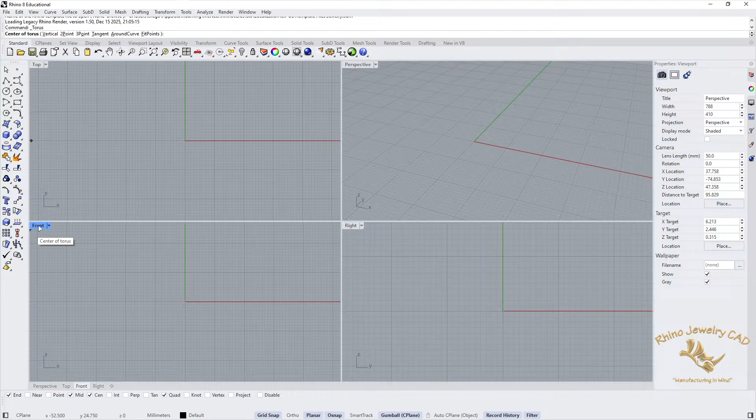Let's take me off the screen. Thank goodness, huh? And we'll go to the display capture here of Rhino. So what we're going to do today is we're going to make a sort of a signet style ring out of a torus. That's one of Rhino's solid objects here, a torus. And in the front viewport, we'll start at the 0, the origin, we call it in Rhino.

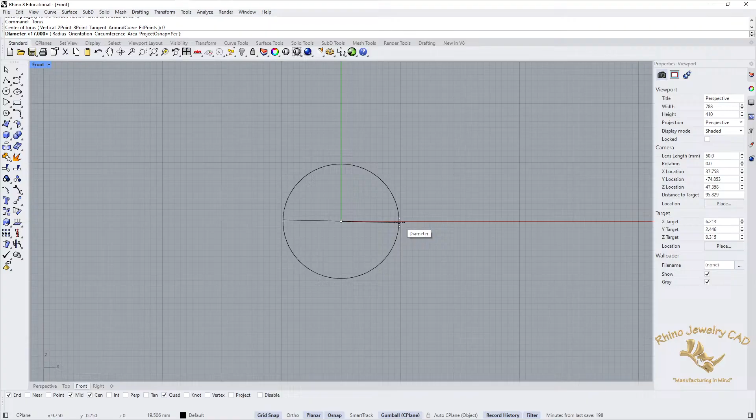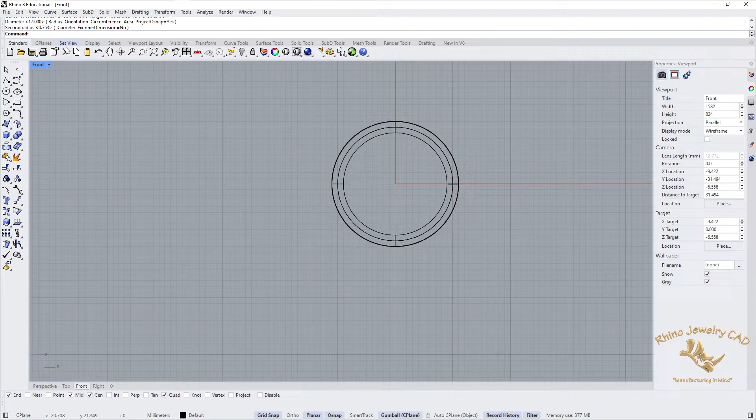And let's see, we know that a size 10 ring is about 20 millimeters in diameter, roughly. So this isn't going to end up a size 10, but we're going to make our first click out here at 17 millimeters. And then we're going to bring this in to, let's zoom in here. And we want this to end up being a shank of about 1.5 millimeters. 2 millimeters wouldn't be bad. Let's go full 2 millimeters. And so now we have our torus. Let's see what this looks like in perspective view.

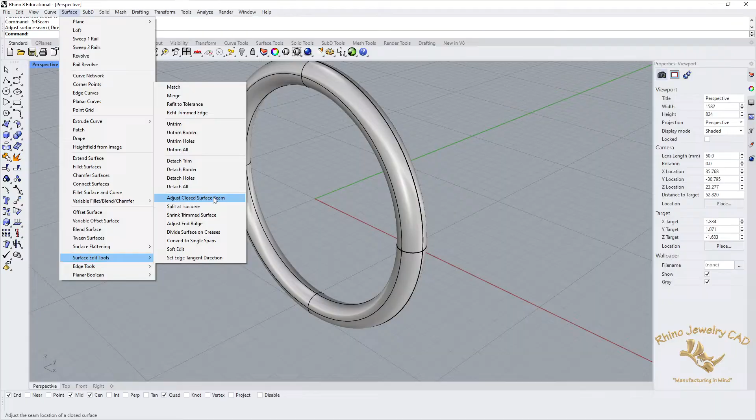Before we continue, we're going to actually do one thing here. We're going to select this object, and on the surface, we're going to surface edit tools, and we're going to adjust the closed surface seam. So right now, it's at top dead center of the outside of this torus. We want to move it to the inside, just like that. Simple enough. And now, it didn't look like the seam actually moved. Let's try this again. Surface edit tools, adjust closed surface seam on here. Yeah, for some reason we didn't.

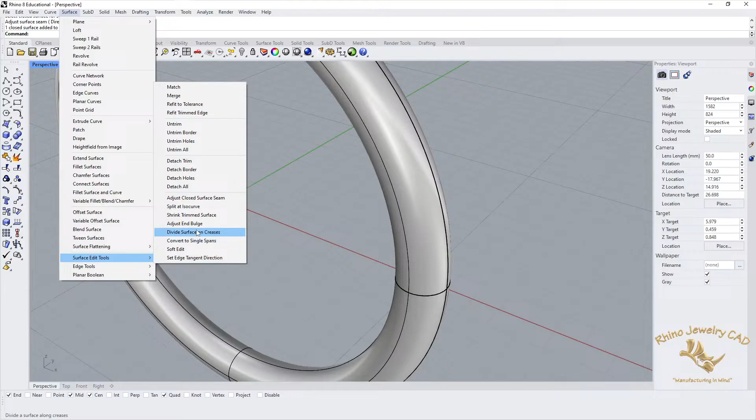Here we go. Let's see. Yeah, there we go. And that should have done it, but it didn't. And see, here's the problem. It worked fine when I was practicing. Oh my gosh. We're going to do this one more time. Surface edit tools. I promise this works. Adjust closed surface seam on this surface. And we're going to take it from here to this midpoint. And I'm still not sure we accomplished our goal.

So now, if you could see my face, you could see that it's really red. I'm going to keep plowing at this until I can get it to work. Let's take off center, mid, quad, and end. Let's unclick end and try this one more time. It's funny, when I was practicing yesterday afternoon, it worked just fine. Surface edit tools, adjust closed surface seam on this surface. And we want it to be right there.

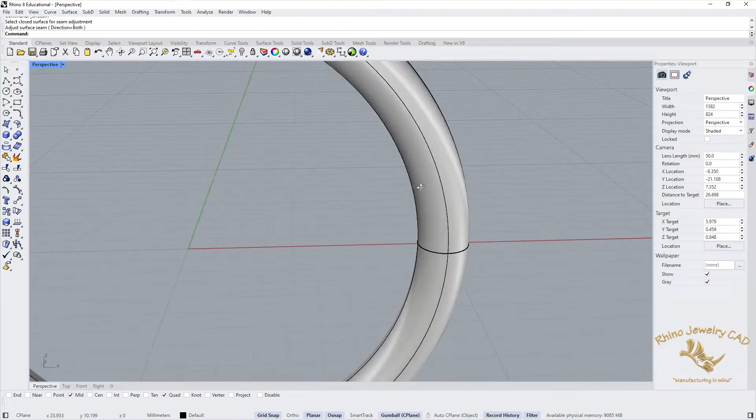And it still didn't work. Well, it's not imperative. It would have made this go a little bit more smoothly, and I'm going to have to come back now and do a short video on why this didn't work for you. But let's go ahead and proceed. I will show you where it would have made a difference as we get a little bit further into this.

I apologize for that little glitch. But see, that's the fun thing about doing a live. You see what happens when you're using Rhino. You run into these little things as they happen.

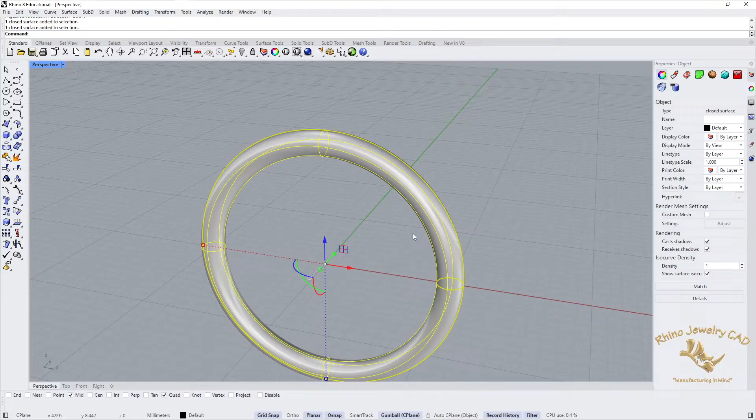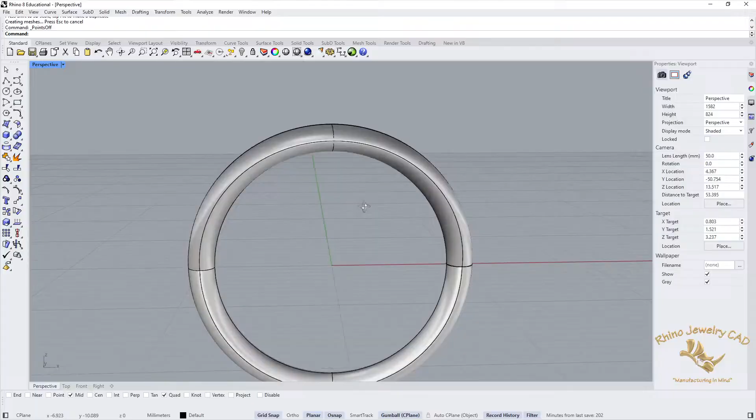Let's highlight this and turn on control points, F10. And one of the things that we want to do here is just make the top wider. All right. Now, here's the deal. I'm going to turn control points back off, F11, really quickly. And that's okay. That accomplished what I wanted, more or less. But I don't like this transition. I would like for that to be a much smoother transition.

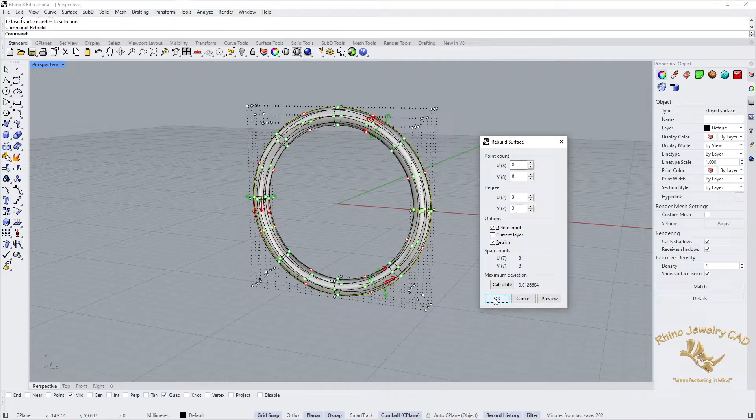So I'm going to Control Z out of what I just did. I'm going to select this and rebuild. And when this pops up, you'll see I don't necessarily want more point count in either U or V, but I definitely want to change it from degree of 2 to 3, and you'll see what difference that makes. Let's click OK here. And you can see that our control points have changed a little bit in character in terms of how they follow the torus all the way around.

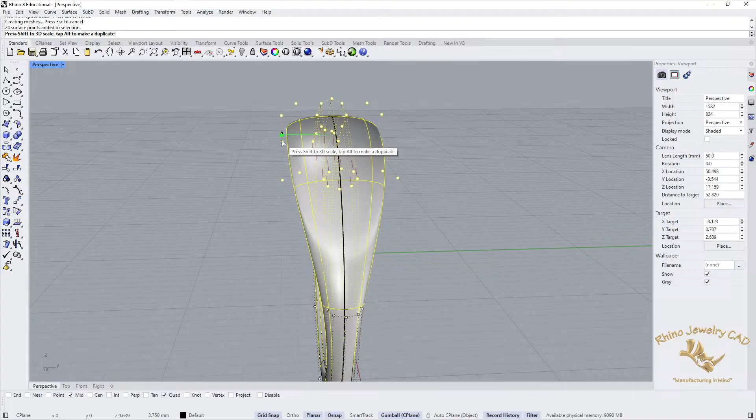Let's select that same group and do the same kind of scale that we did before and watch this transition point here. Okay, see how this is a much smoother transition into the top of the ring? I like that a lot better.

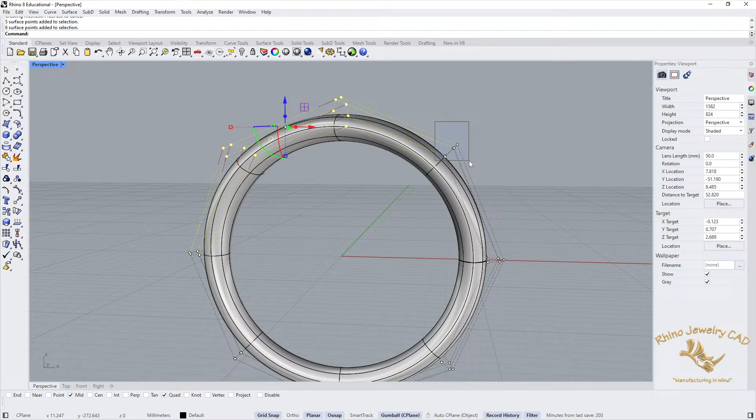Let's leave these control points on for the time being, and let's just select this group of control points. Holding down Shift, we'll select that group of control points, and Shift select that group of control points also. And now we're going to make the top of the ring just a little bit thicker by simply moving those up. And again, since it's degree 3, we have a nice smooth transition all the way around. It didn't affect this transition right here much, but it gave us a thicker area to work with on top.

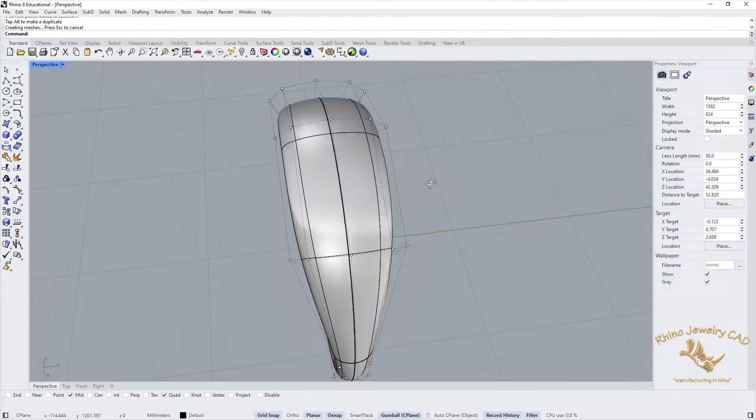It's getting fun now. Okay, let's turn off control points. That's an F11. Pop into the top viewport. And let's make an ellipse. Have grid snap on, so this will make this easy. We're going to just eyeball this ellipse. I'm going to shift constrain it out to the right about as far as I think will be appropriate for what I want to accomplish, which you're going to see in just a minute. And then make it about that wide.

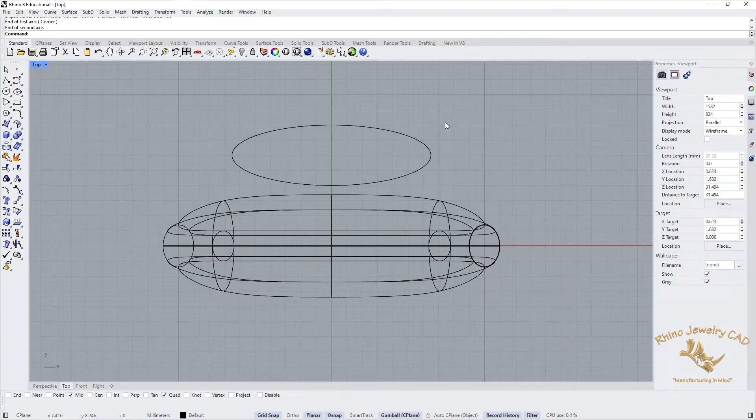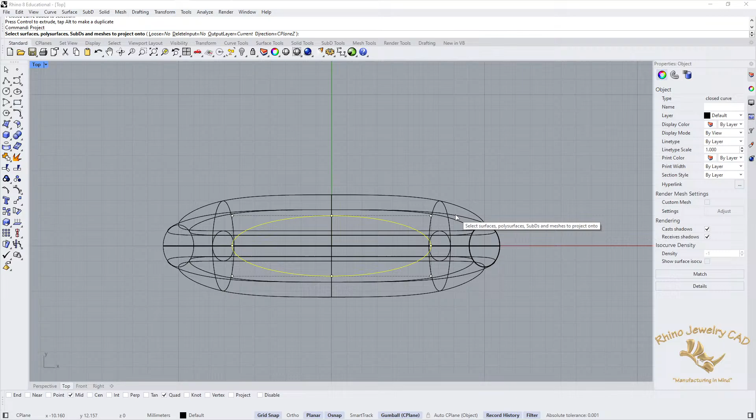And then I can move this down so that it is basically centered on the origin as well as the ring. Let's look at what we have here. Okay, that's in perspective view. We're going to select, use the directional arrow just to move this up. And again, from the top viewport, we're going to type in the command Project. Okay, select surfaces. See, this is still just a single surface. So there's no way to isolate this projection onto the top of the ring, which is the only place where we really need it. But that's going to be okay.

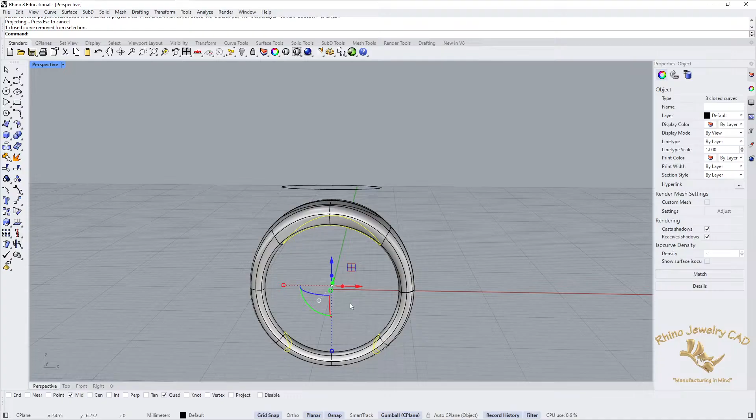Press enter. All right, and now if we look at this again here, you can see that this one at the top is really the only one that we needed. Let's deselect that one and then just delete the other highlighted ones. Okay, if we were going to do good layer management here, I would put this on a layer so that I could come back to it. But in this case, for the demonstration, I'm just going to delete it.

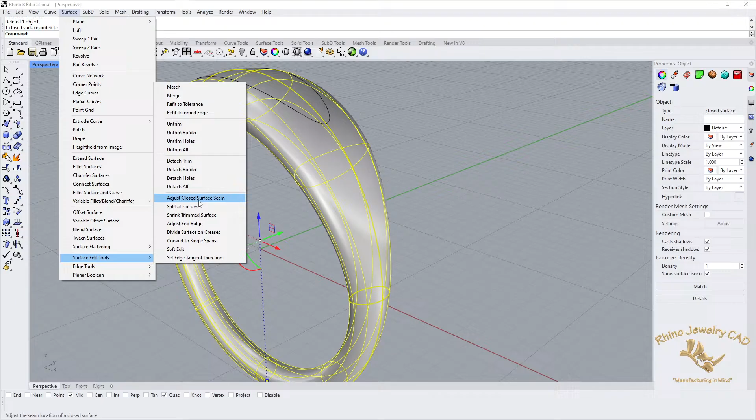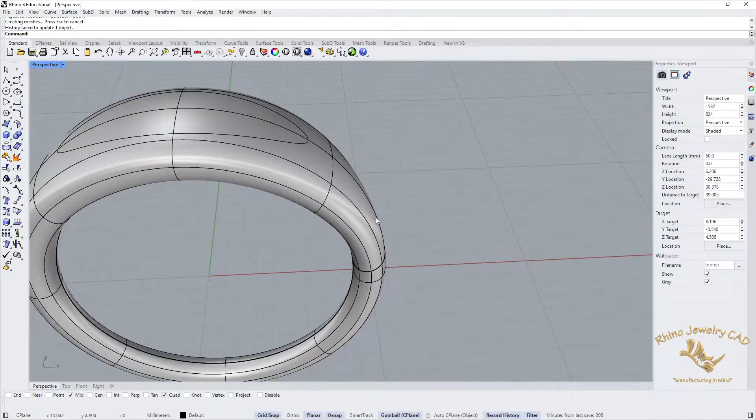All right, I'm going to try this just one more time here. Let's select the surface while we still have it. Surface, surface edit tools, adjust closed surface seam. Okay, now I just don't understand why that's not working, but let's see if that worked that time. Oh, bingo. Okay, we got it. It's not perfectly centered, but in this case, it really won't matter. And I'll show in the next step why this is going to make my life a little bit easier as we progress through modeling this ring.

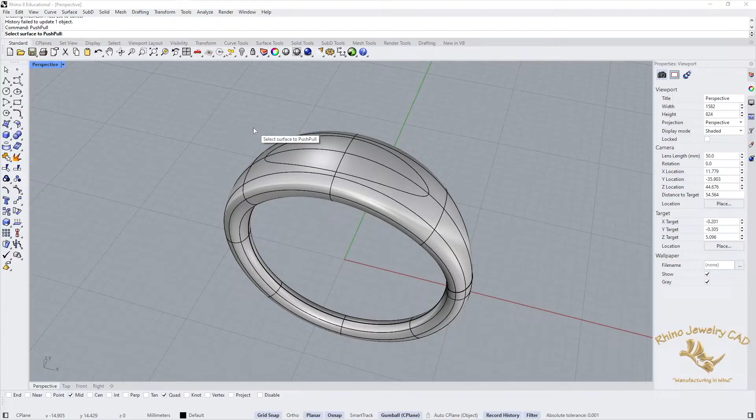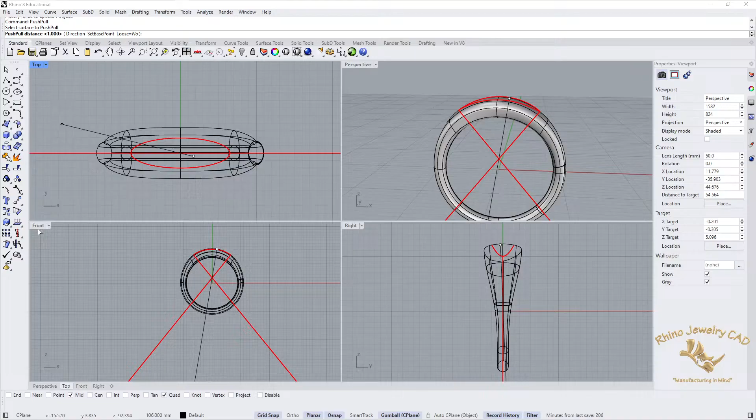Okay, now we're going to use a command that's new in Rhino 8 called PushPull. We'll just type it in, PushPull. Rhino autofills it out in the command line. We push enter. We select the surface that is isolated by the curve on the surface that we created with our projection. And notice how we can pull that out if we want to. In this case, I'm going to switch to the front view, and we're going to pull that surface in just a little bit. There's several ways to do this, of course, but this is a way that is relatively new in Rhino 8 using PushPull.

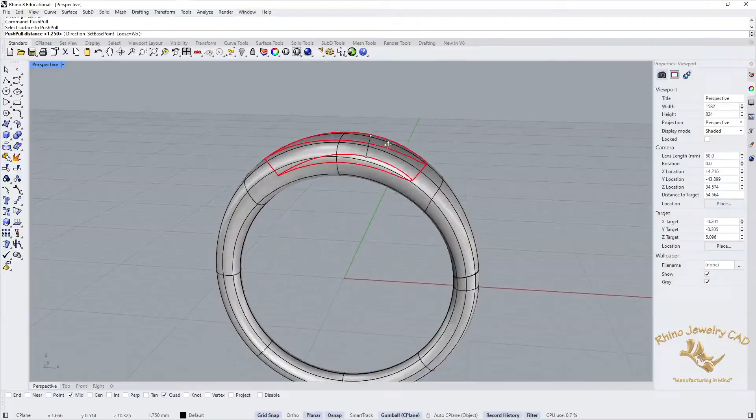Very simple way to create an inlay channel or something. I'm going to Control Z out of that. I really don't want it quite that deep. So let's re-invoke the command, do it here, and let's just make it about that deep. Okay. So that looks a little bit better. Even in a weird demonstration, I like to make things at least somewhat aesthetic.

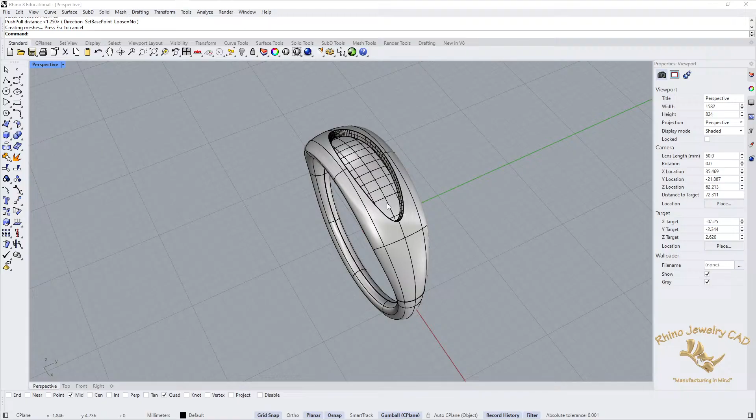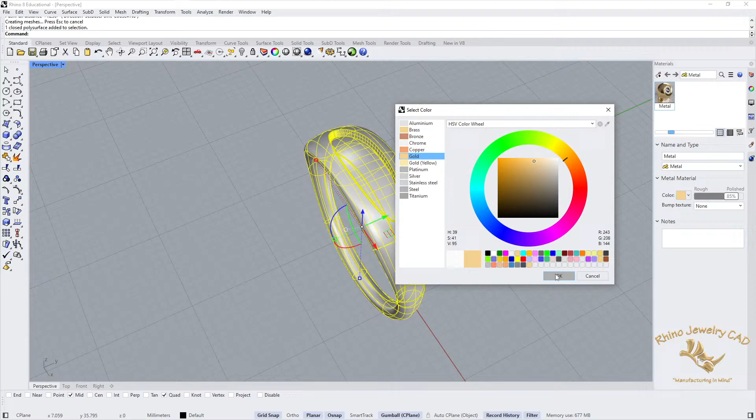Now, the final thing that we're going to do here is talk about managing textures. Now, you know that if we go into the materials, we can assign a material to this. Let's make it be a metal, right? And let's make that a rich yellow gold, which Rhino has right there already. And then we right click on this to assign it to that object. So if we render it now, we can see that it should render as a pretty nice gold.

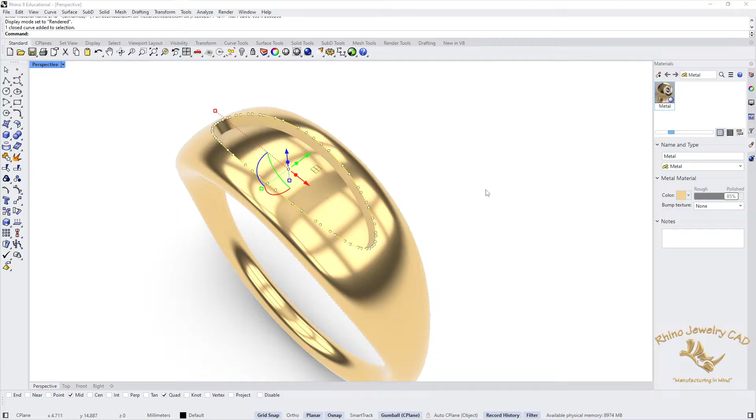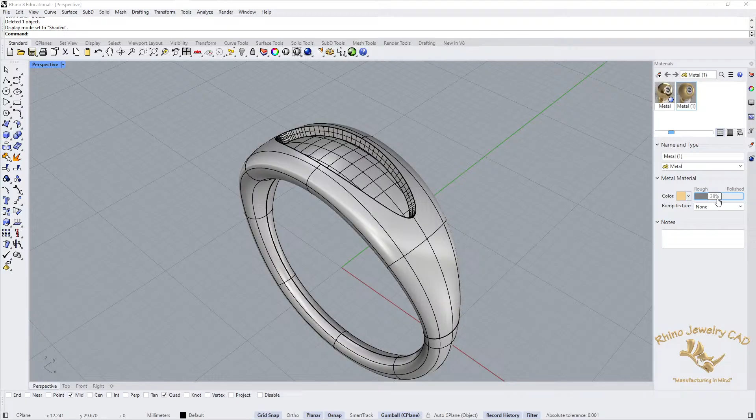Oh, we don't really need this curve anymore. So again, good layer management would leave me putting that on a layer somewhere. But in this case, don't necessarily need it again because this is going to be a short demonstration. So we'll do that. We have this material applied. In shaded view, let's create another material for this. It will also be a metal. It will also be a rich gold color. But let's make it a little less polished, right? And let's just look at what that looks like here real quick.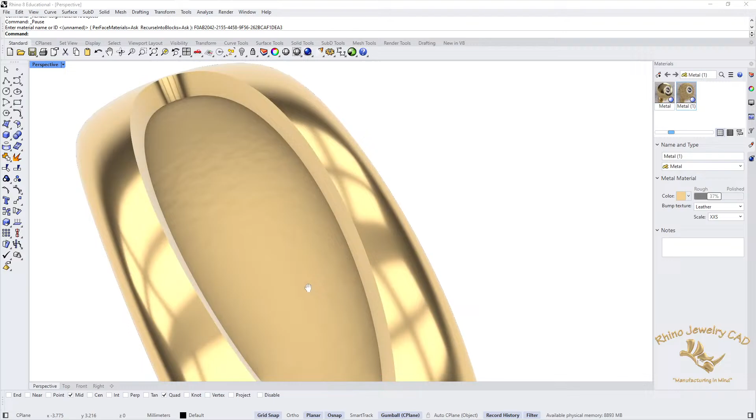Rendered. Oops. We're going to Control Shift select just that lower surface and apply it to that surface. So we can get some differential there, right? We can also apply to this material, let's use leather here, a bump texture, right? And let's make this extra small, which is kind of how it usually resolves best in jewelry sized items. So you can see that we have a differential texture here, but now here's the thing.

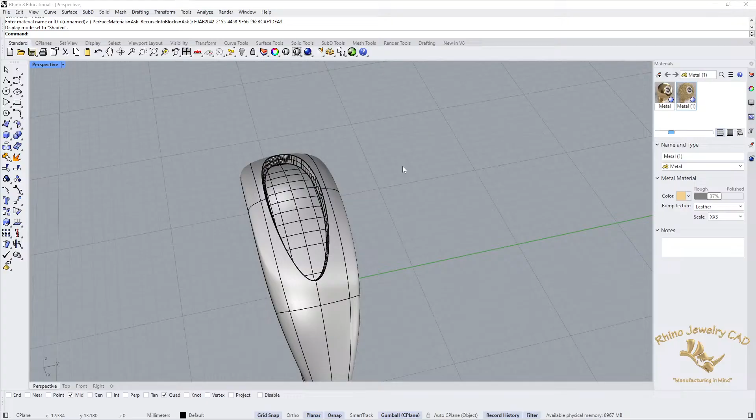The bump textures that you can get in materials application are only for rendering purposes. We go back to shaded and it's not there. It does not exist. So if you export this as an STL, even if it's in rendered mode, that surface texture is not going to go along with the STL file. So that's not exactly how we want to do this. We'd like to be able to print that textured surface right on there. So how do we do it?

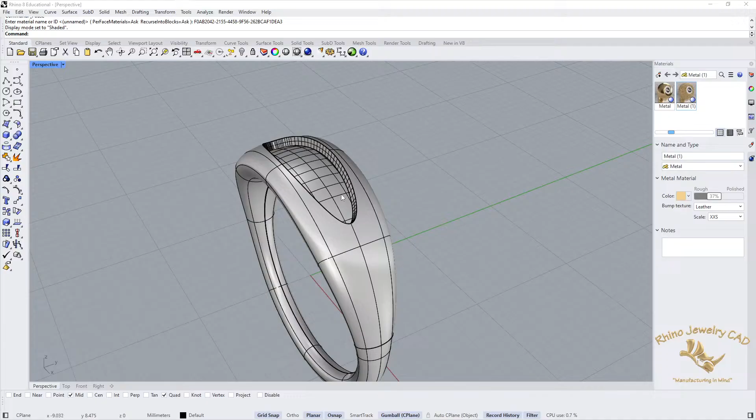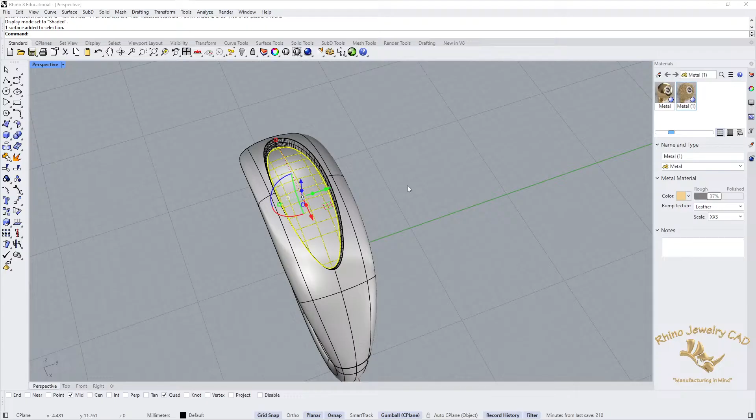Let's Control Shift select that surface. Oh yeah, and the reason for moving the seam, by the way, was if the seam were on the top of the ring still, this would have ended up being two separate surfaces. Now, that wouldn't have completely messed up our operation here, but having it be a single surface by moving that seam just makes it a little simpler for us to think about and work with.

Okay, while we have this object selected, let's go to Object Properties. I'm over here in the upper right-hand part of my screen. We're going to go to displacement. It's that little globe with bumps on it called displacement. Okay, let's assign a texture here. We don't have any to assign yet necessarily. So let's make a texture. I think there's a leather texture here somewhere. Maybe not. Okay, let's just do a granite texture. All right. And we will turn it on.

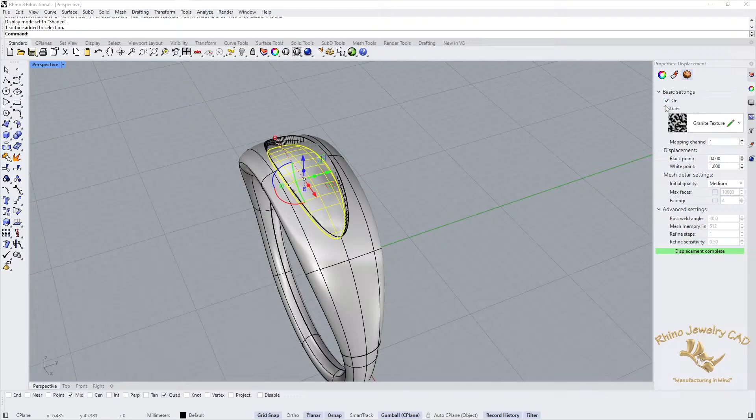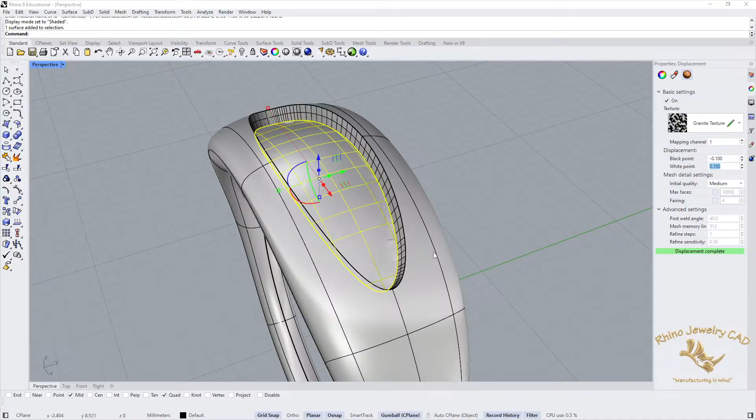And we don't see much here. Let's change the displacement values for black point and white point. So let's change black point to negative 0.1, white point to 0.1, right? You can just see the beginnings of this texture here and some tessellation that's going on. But if we were able to change it from medium to high or very high, which comes up in the pull down here, then we could actually see what this texture looks like on a jewelry scale and get it to print. Now, I wouldn't call it a glitch in Rhino, but in order to make this work, there's something else that you have to do.

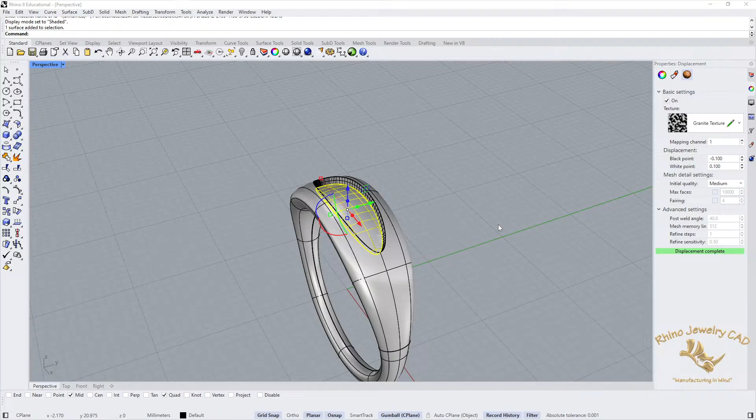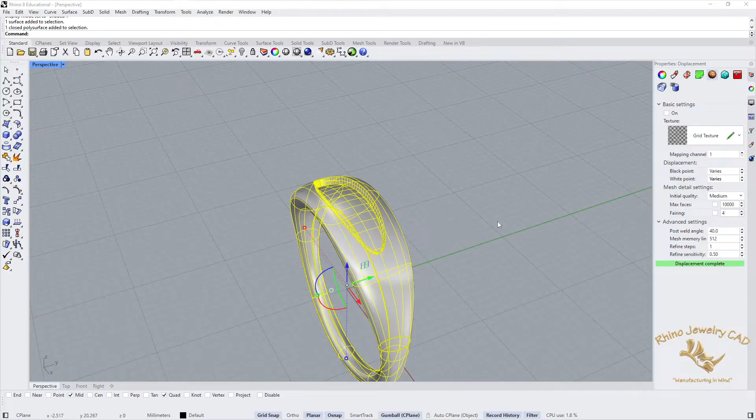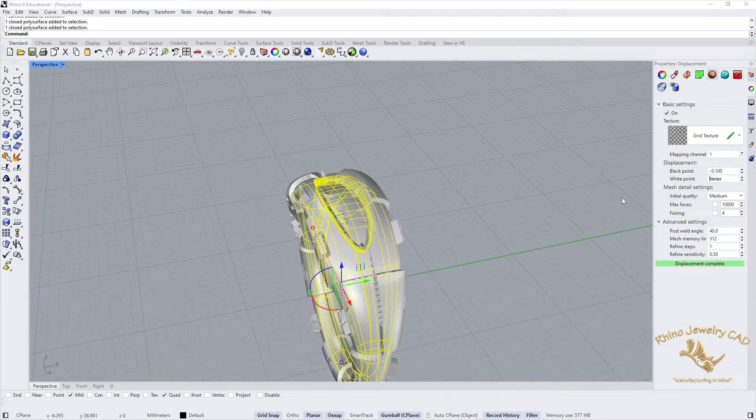You have to select the whole object and, it works best if you create a different texture. Let's use this one, a grid texture. All right. And we will turn it off, right? But here, let's actually turn it on so you can see how this works. This is medium quality. And you can see that's not a very attractive piece of jewelry so far. But we click on this, we do our black point, negative 0.1, and our white point, 0.1. That's going to help things out a little bit.

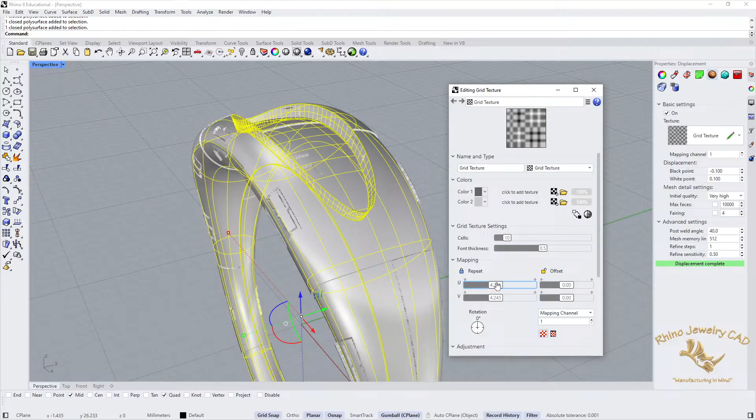But now watch what happens when we go to, say, a very high displacement. And see, that's still not exactly what we want with this. So we're going to change a couple more things here. Let's click on the little pencil and we will repeat this a bunch more times to get the displacement. See, the displacement's got to keep up with it. Here we go.

And the offset we can play with. Down here, there's a gain, gamma, and multiplier. We can make this be more of them on the surface or less of them on the surface. See how you can make these changes - multiplier, color adjustment.

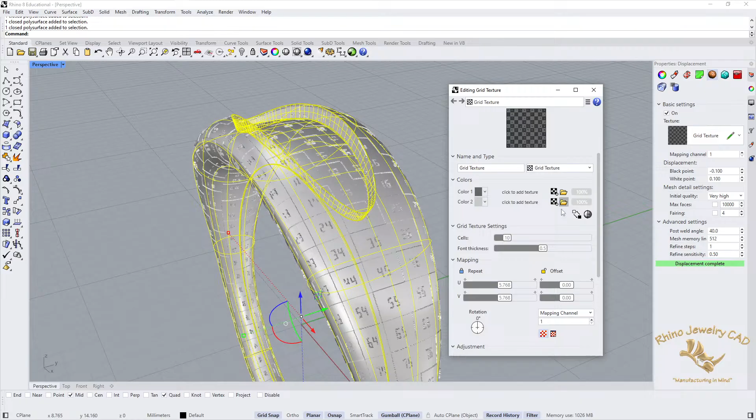But this is almost irrelevant because what we're going to do now is turn this texture off, and then go back to this and turn on the granite texture for just that specific surface, and then turn that on.

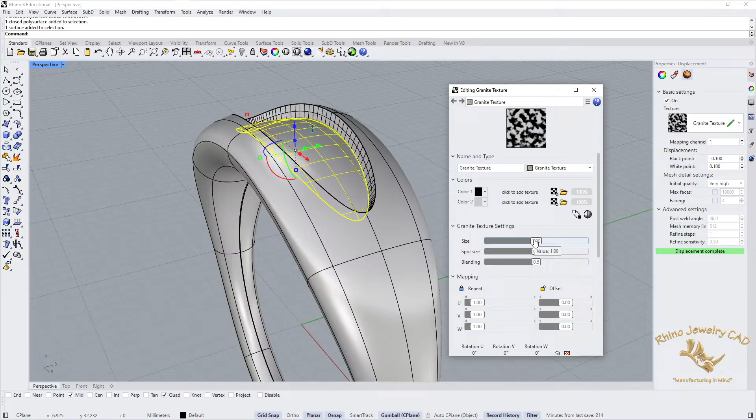And now we can play with this a little bit. Size - let's move the size down quite a bit. There we go. Now we're starting to get exactly what we want out of this. Okay, repeat it. There we go.

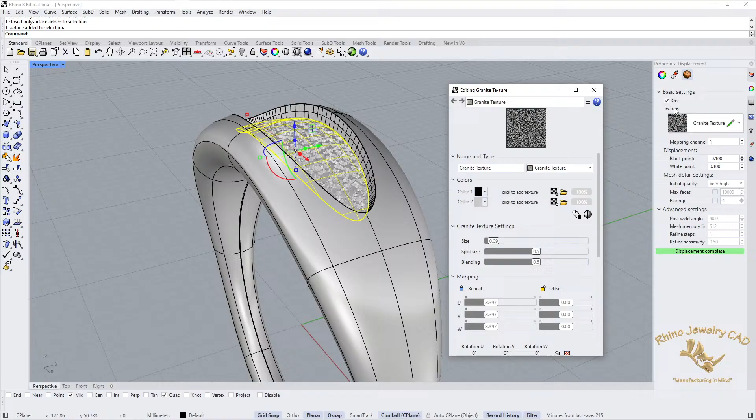You can see the displacement. It takes Rhino just a little bit to figure out or program the displacement into it. But that's pretty darn close to what we wanted. Now we have this, and this is at very high resolution.

Now, if we zoom in on this, this is a printable surface now. You can also use a bitmap texture if you have a picture that you'd like to have reproduced here.

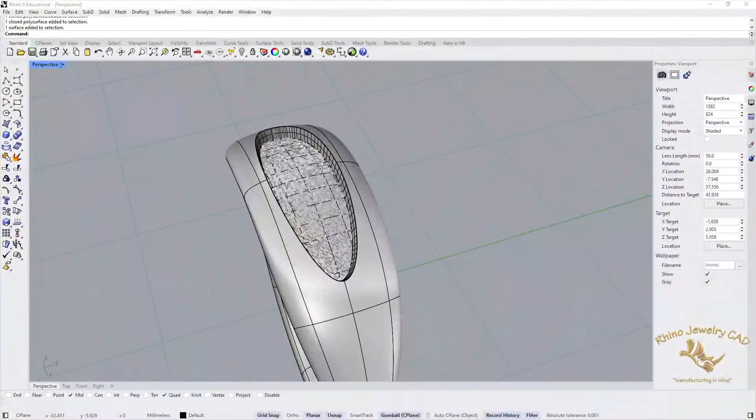Let me see if I can find this really quick. Stand by one second, and I'll show you something if I can. Let's... oh, here's what I want to do. Sorry. Coming up should be another version of Rhino. Let's open, let's go to my inventory, and I'm going to search for cactus. Come on, there we go. Cactus, turquoise - no, let's see.

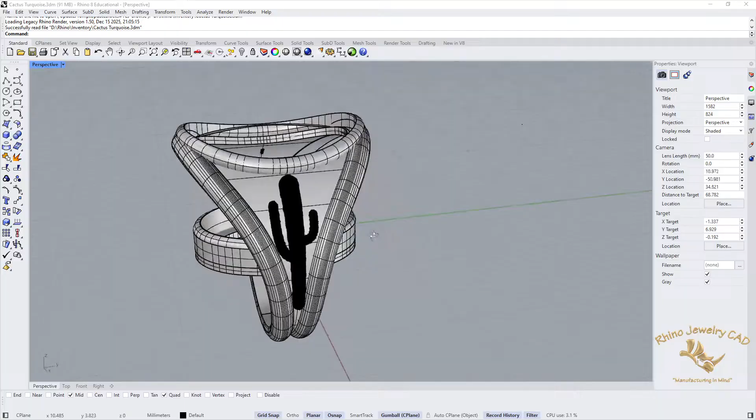Okay, we're going to bring this one up. You can look at it pretty closely. Okay, here we go. And if we render this, you can see - okay, this texture actually came from a picture of a saguaro cactus. So that's how you can use a picture to create a texture.

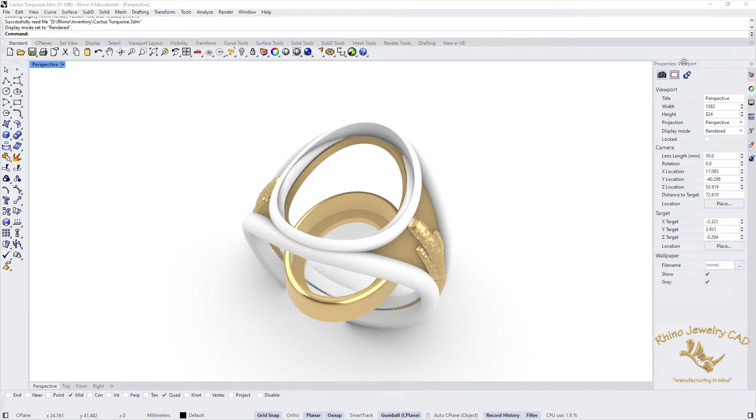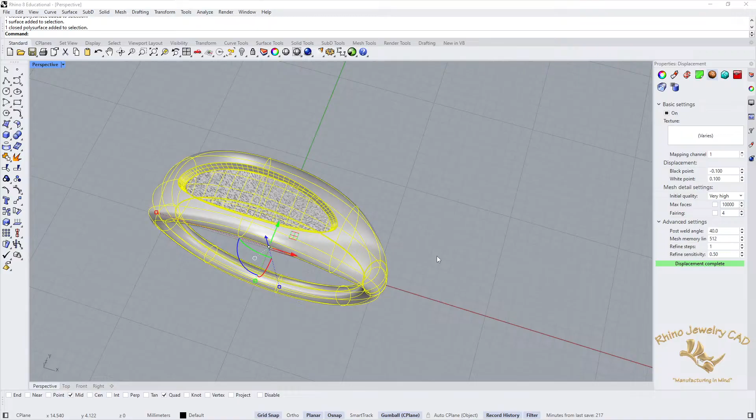So let's bring back our signet ring. And just to test the theory here, just so you can see that I'm not joshing you about this stuff, let's pick this and we'll alt-copy it over here. And you can see how this texture actually came with it.

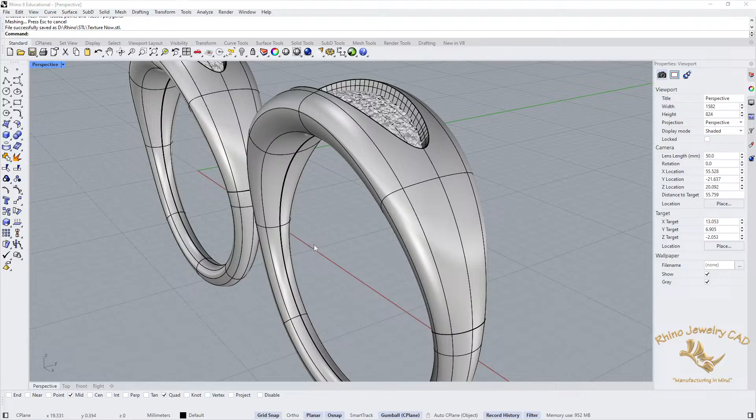And just to test one more time, if you'd like to: File, Export, Selected as an STL file. Texture now, we'll call it. Okay. And now let's just import that file. Import texture now. Okay.

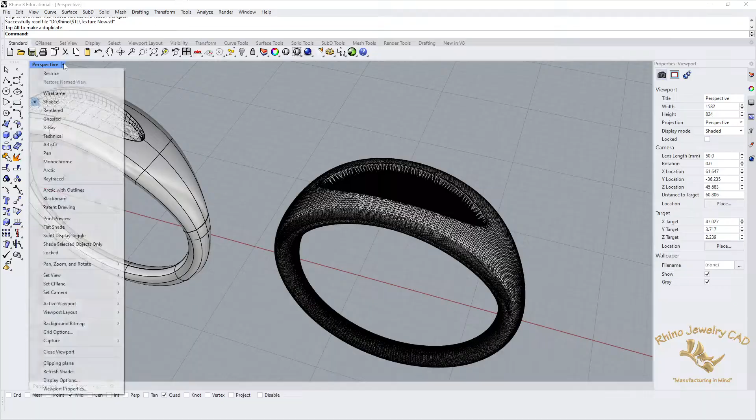And we'll move this STL mesh over here. We're probably going to have to render it to see what it looks like. But see, the texture did export with the STL file.

All right, so remember, here's the trick you need to know: if you want to do a differential texture on a piece of jewelry, you first have to apply a texture to the whole object in order to be able to use the different resolution settings built into Rhino in the object properties. Oops, that one was a copy, so let's go to this one.

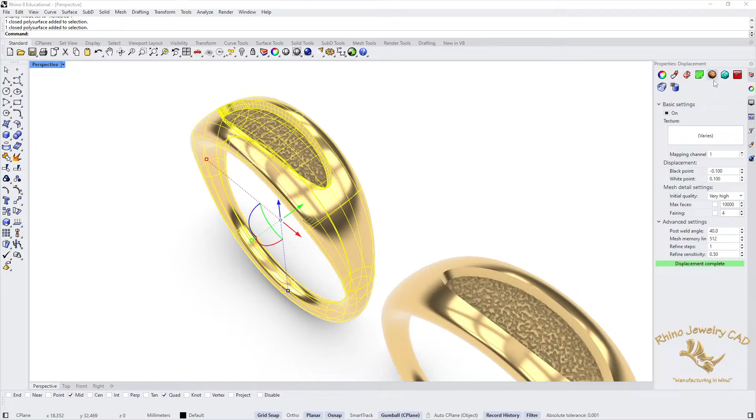And we can go to object properties, texture off on the whole thing, and then on granite texture here. And then we can get to these higher settings of initial quality and max faces, and all this other stuff remains viable. Okay, well, that's it.